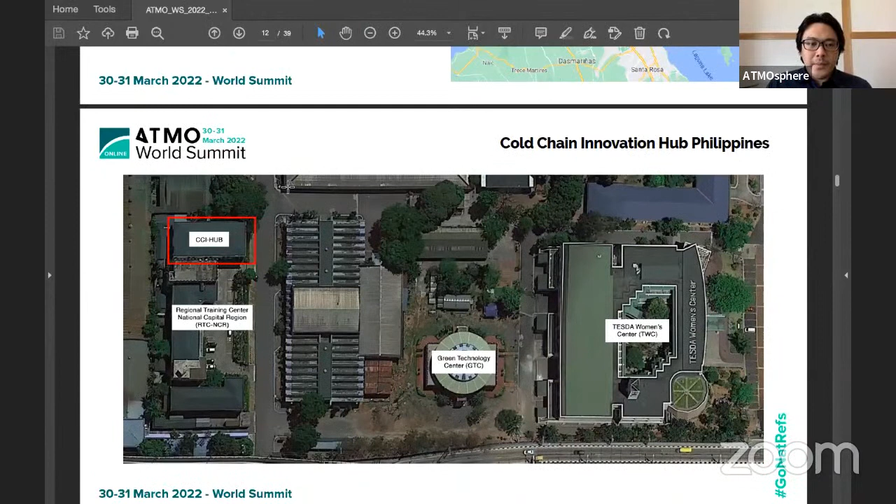So this is the campus of TESDA, and you can see here on the top left corner where we've highlighted that this is the actual CCI-Hub building. This is part of the old engine building, the old training center for TESDA, that we've converted to be used for the CCI-Hub. So we're actually really excited today because we're going to be showing you some of the most recent updates that we've had working with several project members on the ground to help renovate this facility. So we'll be talking about that a little bit later.

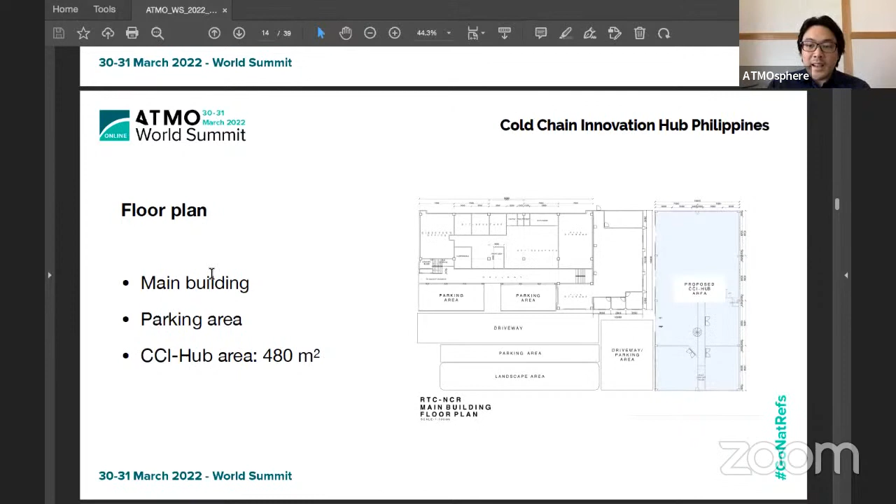Just really quick, to give you an idea, here's the floor plan of the building. There's a total area of about 480 square meters. It's actually a very high ceiling in the exhibition area. We also have different training rooms set up. The way we'd like to organize this is we'd like to separate the different areas to focus on different specific sections of the cold chain.

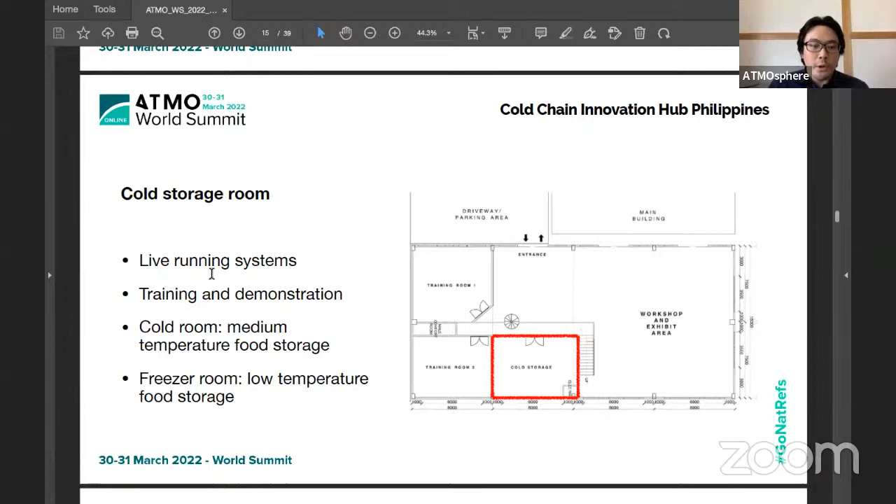So we have the cold storage room where we'll have live running systems for training and demonstration, highlighting the different temperatures, medium temperature, low temperature for food storage and food retail and post-harvest facilities and transport. We also have a specific training room. So we also like to have classrooms or more small scale training on different components, demonstration of these technologies, display cabinets and plug-in systems. So a little bit on the smaller scale, more light commercial type of equipment.

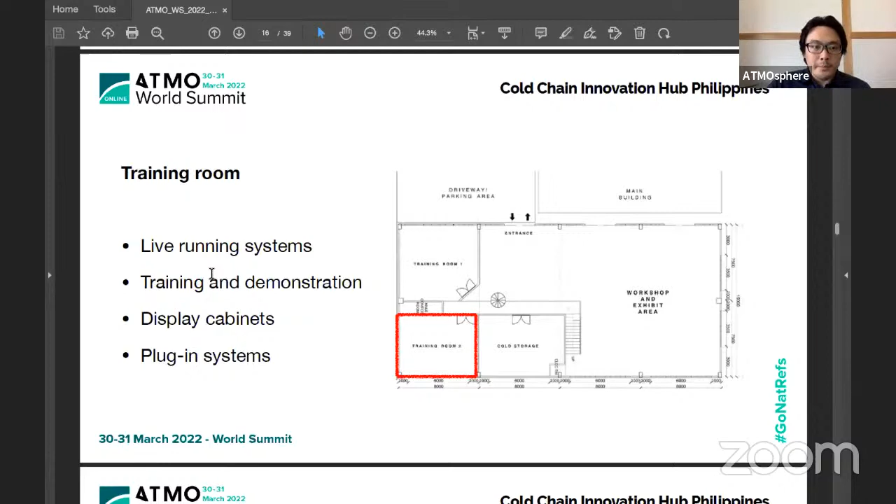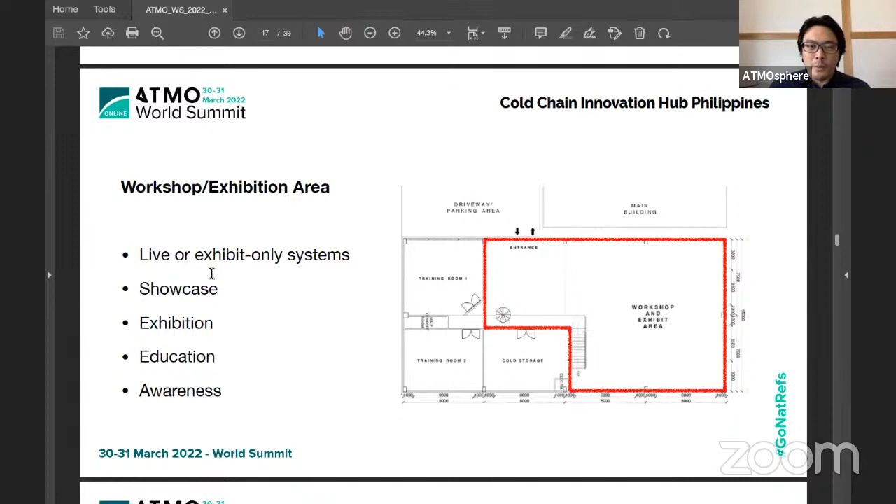And finally, we also would like to highlight the workshop and exhibition area. So this is the very large space where we're going to be having the main exhibition, where we showed you a little bit of the concept sketches before, but we're going to be showing you a little bit more in a few minutes.

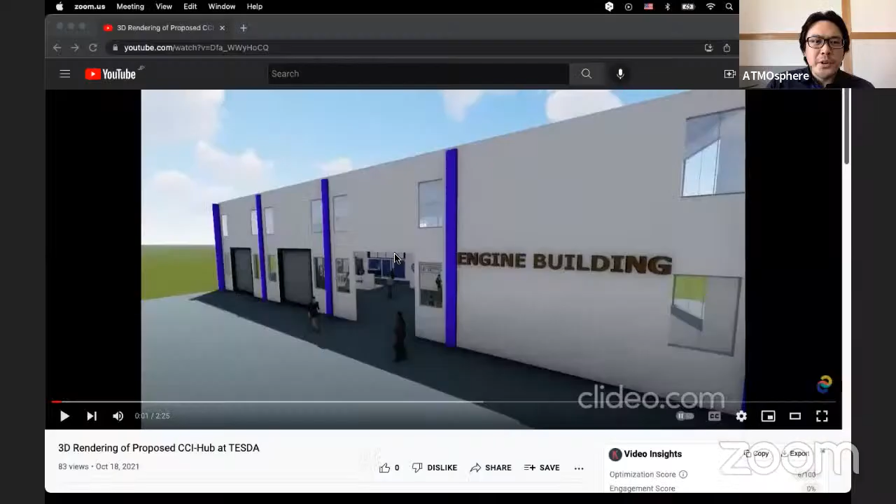So finally, I'd like to just highlight that TESDA and a lot of the project partners have already come together and put together this really interesting video that we would like to show you right now. Please give me a second. I'm going to show this 3D rendering that was produced for the facility. And we'll just give you a little taste of what the vision was we had a few months back that we are working very close to achieving today.

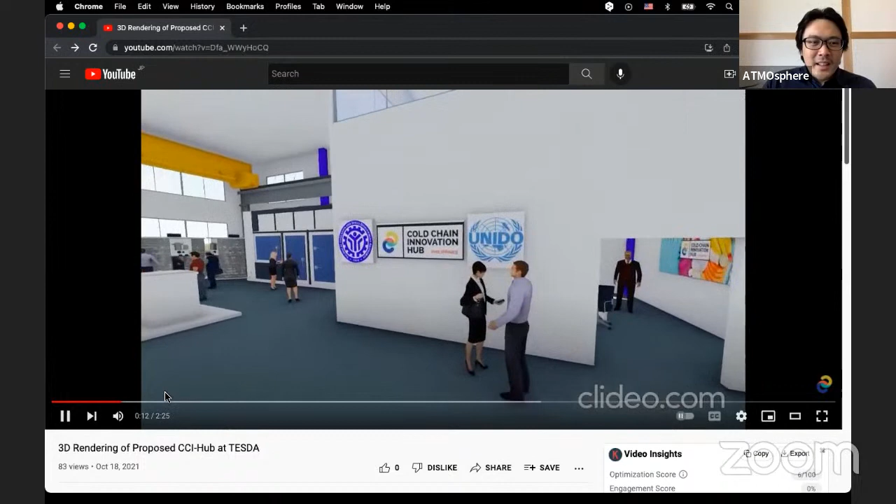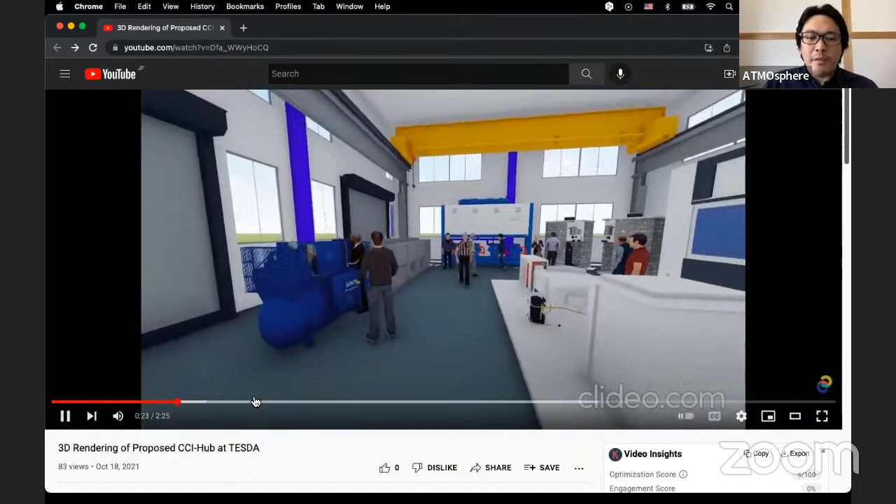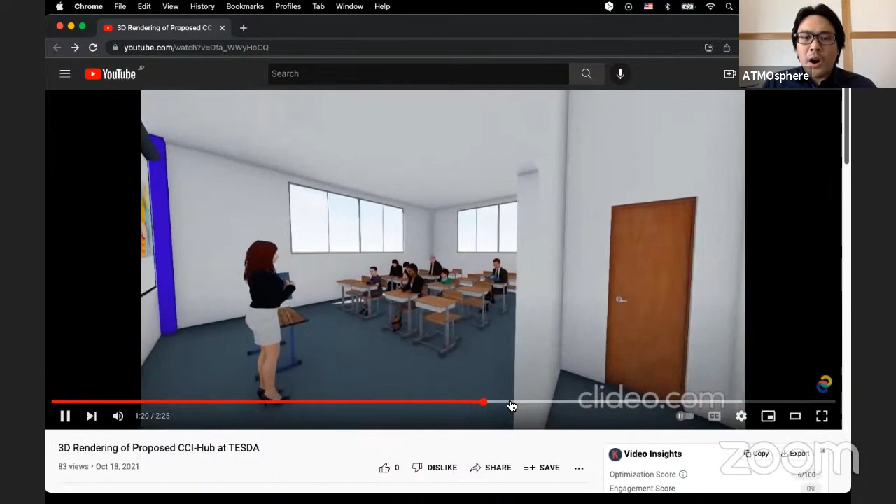So just to show you here, this gives you a more real sense of what it would be like actually in the exhibit area, where we'd have different equipment being exhibited. We have people in there exchanging knowledge, networking as well. We also have a second floor here. I'd like to show you real quick. I'm just going to skip through this. We have training rooms, classrooms, meeting rooms to help facilitate the networking of all the different stakeholders in the industry. We go upstairs and we also have smaller component rooms where we can focus on even more experimental new media ways of training.

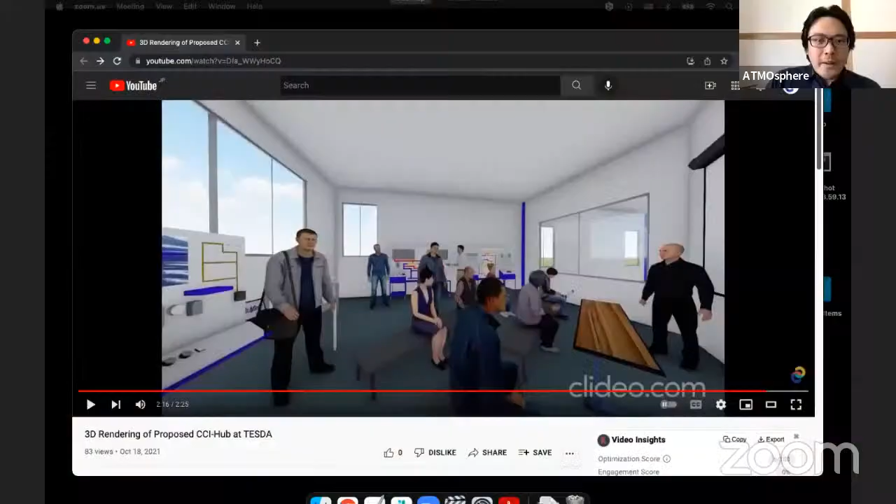So like virtual reality or online training as well. Something really exciting. So we're really grateful to our project partners to have put this together. And now I'd like to move forward and go back to our presentation because we have some exciting developments to share with you today. And I'm going to bring on our next speaker, Jan. Jan, please go ahead and take it away because we have a lot to tell you all.

Thank you very much, Devin, for the initial introduction of the Cold Chain Innovation Hub project in Philippines. My name is Jan. I'm the head of the global partnership at the Cold Chain Innovation Hub project in Philippines, and I will be very happy to show you the recent progress with the facility. I will take you through the very important aspect of the project, which are the contributions from the industry and the cooperations that we have been working on the last 12 plus months. We will also talk about the future of the hub and the planned activities for this year and beyond.

So far you were able to see the vision that we had together with our project partners, what kind of facility we wish to build, what kind of facility will bring the necessary elements of technology, expertise, knowledge, materials, tools to the industry to help accelerate the uptake of energy efficient cold chain technologies based on natural refrigerants. So I will start off with the pictures and some of the visuals of the actual physical space that several of the partners and contributors have been working on very hard the last several weeks, and this is the first time we are actually previewing these pictures with the public. So let me start.

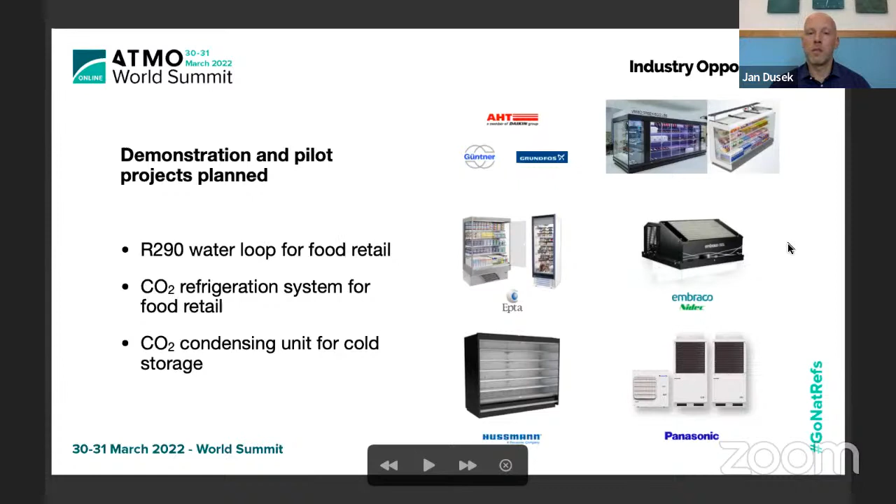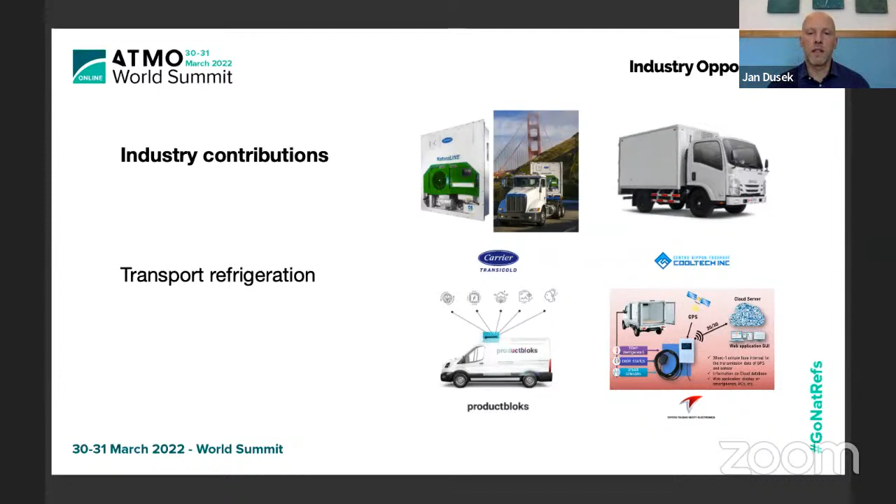Another sector that has been identified as a very important part of the cold chain in the Philippines, and one of the bottlenecks when it comes to reducing food waste, is transport refrigeration. We are very happy to also introduce a consortium of companies that will be working with us on introducing transport solutions using both R290 and CO2. Namely, Carrier Transicold is contributing with their CO2 NaturaLINE container and the R290 refrigerated unit module for refrigerated trucks. So these technologies will be present at the hub, and we are actively working with our project partners to make this first pilot R290 refrigerated van also available at the hub.

This is in more detail the specific refrigerated truck. Again, we are working with a number of companies: supplying the refrigeration unit, Cold Front, a leading contractor working with natural refrigerants in the Philippines, the local company Centro providing the insulated panels, and Nexty Electronics offering remote monitoring of the system. So we are trying to pack a number of the latest technologies and introduce this concept to the Philippines, starting with the first unit at the hub. But we believe there is quite a lot of potential for this technology to be commercialized, and hence we see this as a starting point for this business opportunity for the industry.

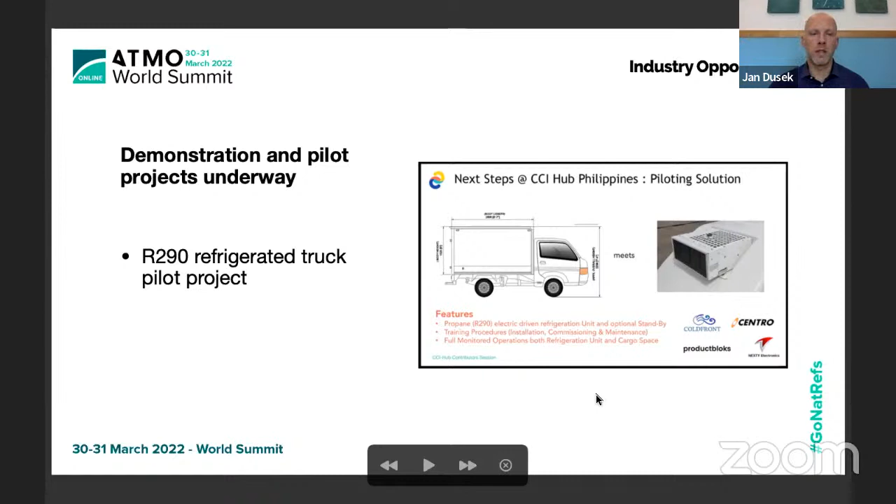Further on, we are also happy to work with Vestfrost and Danish Technological Institute to have access to their latest technology using solar to provide power for the cooling, for the refrigerated system. It's basically a chest freezer that is deploying solar panels and batteries to fully provide the power to the compressors that is running the system.

This will be also one of the first, actually the first of these systems to be installed and tested at the Cold Chain Innovation Hub. And again, there will be an opportunity for us to deploy this technology to the market to help cover some of the cooling needs in off-grid locations for both post-harvest refrigeration and other needs. So we also believe there is a lot of potential for this technology in the Philippines.

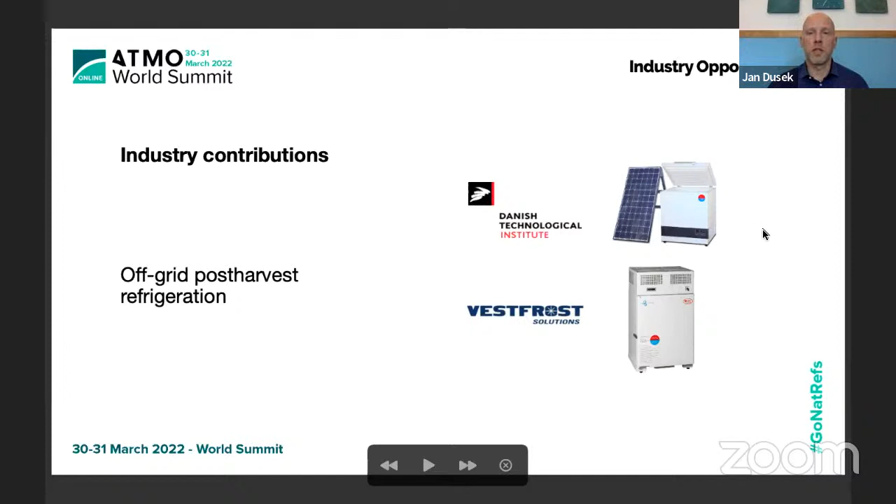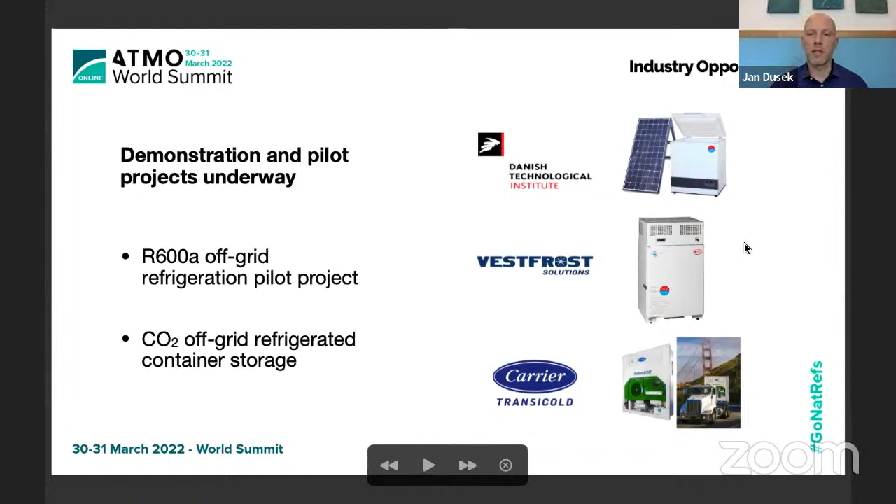This is what I have just mentioned, the off-grid refrigeration pilot projects using both R600a and CO2. We also know that Carrier Transicold have introduced an additional module to their NaturaLINE, which basically provides the power to the unit via solar. Hence, both of these solutions can be deployed off-grid. So we are excited to test and pilot some of these technologies, demonstrate their viability in the market to, again, help the local industry to understand what the options are when it comes to sustainable, efficient, and viable technologies.

We are also very happy to work with other companies that are providing their expertise, their know-how when it comes to training, commissioning, installation, maintenance of the systems, namely Cold Front, Nihon Netsugen Systems, Future Green Now, and TECO. So very happy to be working with a number of leading companies in the Philippines and outside in Europe, Germany, South Africa, that have long expertise when it comes to natural refrigerants, CO2, R290. So the training, technology transfer, knowledge, expertise is really a very important aspect of the whole project. And April onwards, May onwards, we do plan to have a regular training program for the industry at the Cold Chain Innovation Hub.

I'm also very happy to introduce for the first time our new cooperation with Nihon Netsugen Systems. Nihon Netsugen Systems are a leading supplier of CO2 transcritical condensing units for the industrial sector. And Nihon Netsugen Systems has confirmed they will contribute a dedicated CO2 transcritical system that will be designed for the needs and the function at the Cold Chain Innovation Hub, that will be used as a training tool, a training rig for the industry. So very pleased to receive this contribution from the industry. The system is being designed as we speak, and we very much look forward to having this unique, first-of-its-kind system at the hub accessible to the industry. So big thank you also to Nihon Netsugen Systems.

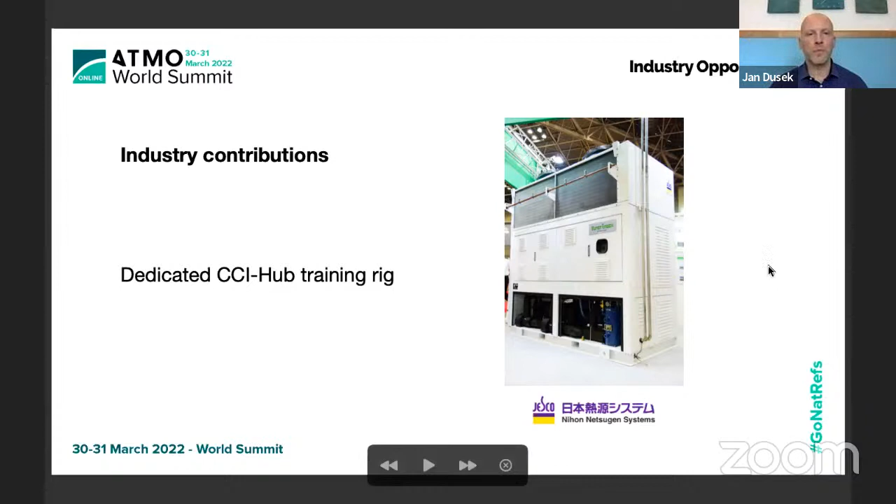Why contribute? We believe that there are a number of reasons which companies have in mind working with us. To name some of them, to be associated with this international sustainability-led initiative is something that, of course, the companies can take big credit for. They are being associated with the market-making activities, to really be the first, showcasing their expertise when it comes to these technologies, providing help to the industry as the industry is ramping up their skills, their knowledge and access to technology. This can help position these companies well into the next stage of the market, which really is the introduction and ramping up of the uptake of these technologies. So we believe that there are a number of both sustainability-driven reasons as well as business reasons for the companies to be involved in this initial stage of building the market in Southeast Asia for natural refrigerants and efficient cold chain technologies.

So we do hope that a number of other companies will be reaching out. We will be proactively approaching other companies, and the goal is simple. We would love to have access to the latest and the best technologies out there, ranging from systems, tools, training know-how, expertise, everything and anything that can help contribute to building up the knowledge when it comes to the latest technologies in the Philippines, as well as access to the expertise and being part of the training that will start in a few weeks' time.

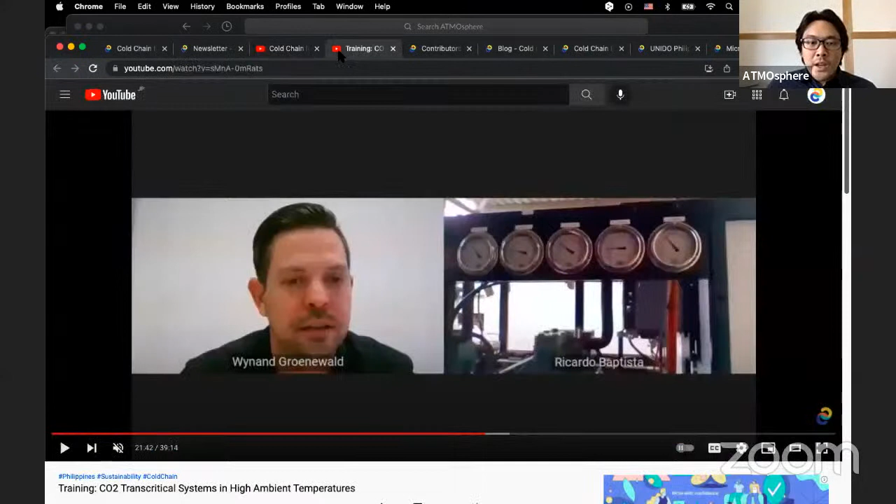And let me also take some time now to show you a little bit more about what we already have online. So we have a number of different webinars that we've already held to date with so many different experts in policy, regulation, technical training, local experts in the Philippines, overseas experts discussing a number of different topics. So if you go to our YouTube channel, you just type in Cold Chain Innovation Hub Philippines in the search box, and you should find our YouTube channel where we have a number of different sessions already uploaded online. One of these sessions I'd like to highlight is one we did a little while ago with an expert named Wynand Groenewald, who is from Future Green Now, one of the training partners, knowledge experts, who has already partnered with us and who will be providing this expertise.

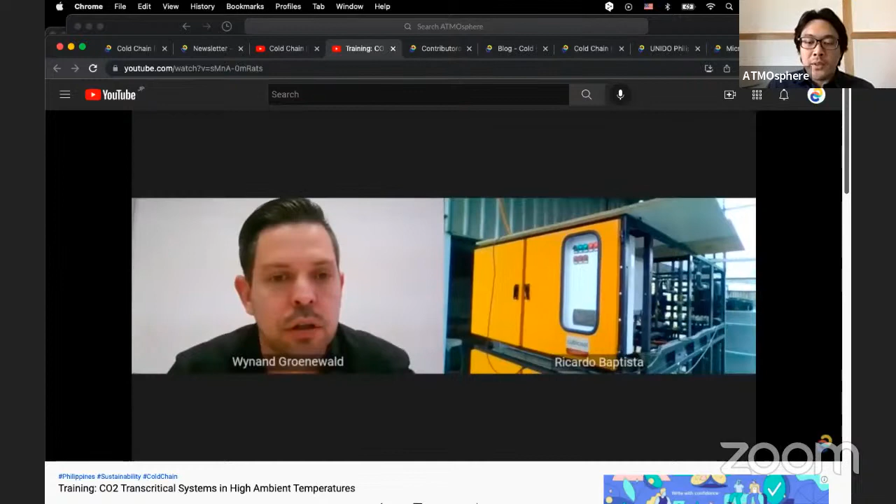We have this one webinar we did with him a while ago on CO2 transcritical systems in high ambient temperatures. He was able to walk us through live one of the installations his company was involved with in South Africa, where they had a live running CO2 system. They talked a lot about it. So we already have a bunch of training materials online.